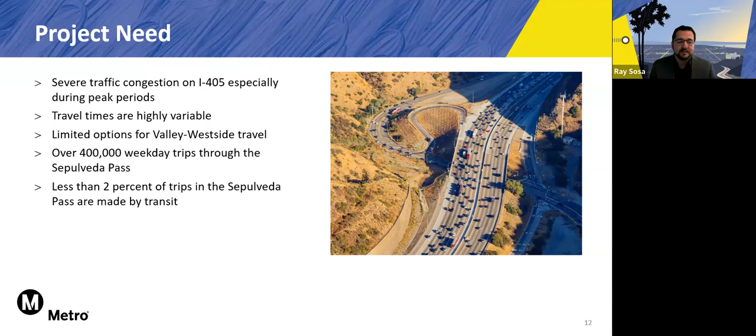So there are goals and objectives in this study. We want to improve mobility for everybody, whether you're driving a car, whether you want to take a bus, or you want to take a bicycle. We want to make sure that there's improvement for everybody. We also want to make sure that the solutions we come up with are cost effective and minimize risks, and also support local economic and community development. At the same time, we know that this is a very sensitive corridor, so we want to protect environmental resources and enhance the corridor's resiliency in case we have any sort of emergency, natural or non-natural, so we can have a system that we can depend on.

So we're weaving all our alternatives across 4 areas. We want to improve transit, we want to reduce congestion, and we want to do those things in a multimodal, holistic way, looking at the complete range of solutions that provide access and opportunity for everybody in a fair and equitable manner, and we want to do that in a sustainable way. With that, I'm ready to hand it over to our project director, Cory Zelmer.

Thank you, Ray, and good afternoon, everyone. As Stephanie mentioned, we'd like to start with a little bit of background on the project for those newer to the project with us. What I'd like to do is start by going back through a few key milestones and events that brought us to where we are currently in the project. That goes back as far as 2016, when LA County voters approved Measure M, a half-cent sales tax throughout the county that allowed for funding to go towards this project and for the implementation of transit improvements between the San Fernando Valley, the West Side, and eventually LAX.

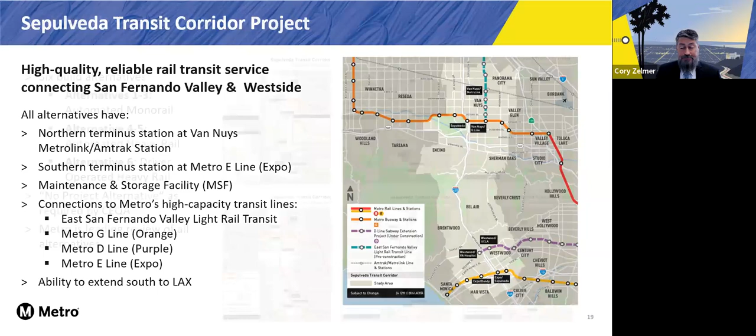So I'd like to now switch to the remaining 3 alternatives, alternatives 4 through 6. These are heavy rail alternatives, most similar to today's existing B and D line in the Metro system. Alternatives 4 and 5 are being advanced by one of the PDA teams, Sepulveda Transit Corridor Partners, and they are also both proposing automated heavy rail technology, which means the trains do not require an operator.

So let me go through a description of each of these. I'll start with alternative 4 first. Now, alternatives 4 and 5 have the exact same alignment and proposed station locations for both of them, so I'll walk through alternative 4, and then I'll just explain the difference alternative 5 has from alternative 4.

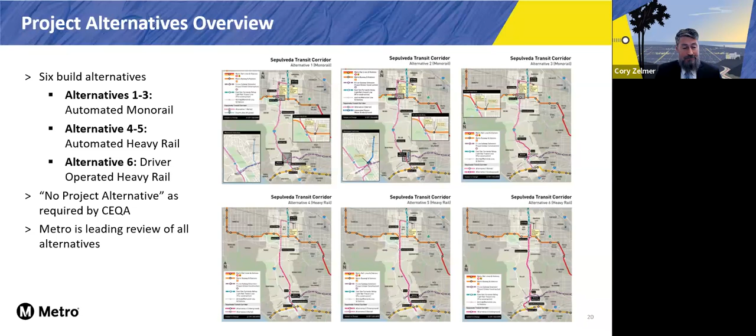Right now, we're preparing a number of technical studies for each of the alternatives. These studies eventually inform and feed into the preparation of the draft environmental impact report. We do expect to release the draft EIR early next calendar year, with at least a 60-day public review period. Following that review period, we expect Metro staff will take to the Metro board a recommendation for a locally preferred alternative, essentially the recommended project to advance toward construction.

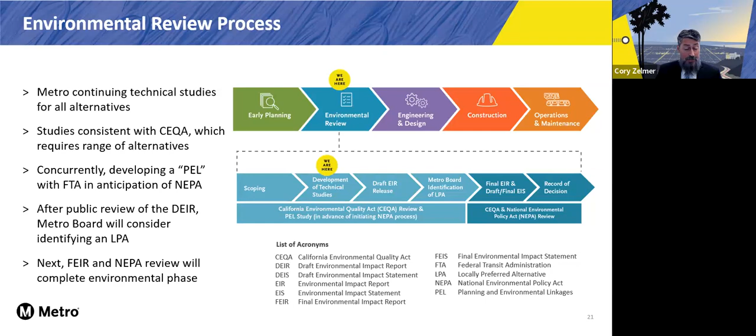Should the Metro board choose to approve that project, we would then move into preparation of the final environmental impact report, and in parallel begin the federal environmental review process as well. Once we complete both the state and federal environmental review steps, we will have completed the entirety of the environmental review phase.

So how do we get to a single project that we would recommend? There are a number of inputs that go into that evaluation, starting with public input. We want to hear from you about your thoughts and concerns around the different alternatives being proposed, and any thoughts about potential environmental impacts that may be associated with those. We will also conduct environmental analysis, which I'll speak about in just a moment.

We're also looking at technical feasibility. Can these projects be built in the constrained environment we are working in? We also want to look at schedule—how long would it take to get each of these projects open for service for the public? And lastly, financial considerations, both in terms of what it takes to build, operate, and maintain a new transit line, as well as leveraging our existing local resources to pursue other opportunities at the state and federal level for funding.

So in terms of the environmental review itself, it's one component of this evaluation, and an important one—it gives us a lot of good information to make decisions from. During the process, we want to evaluate the performance and benefits of each of the alternatives. We obviously study the potential for environmental impacts associated with both the construction and operation of each alternative.

We also want to look at the proposed project and its impacts in relation or combination with other projects in the study area with similar impacts—we refer to that as cumulative impacts. And lastly, where we do identify potentially significant impacts, we strive to find mitigation measures, which are simply actions we take to avoid or substantially lessen those potential significant adverse impacts.

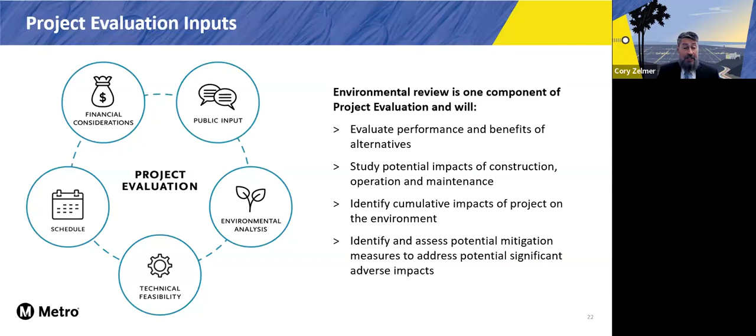So with that, let me hand it to Anthony, who will take us through our outreach efforts to date.

Thank you, Cory. Once again, my name is Anthony Crump, I'm the Executive Officer for Community Relations. The journey of our current phase started in November of 2021, when we kicked off the environmental review process with our scoping meeting. At that time, we held three virtual meetings with more than 500 attendees and received more than 3,000 comments as part of the scoping period.

We continued our outreach with a survey in the summer of 2022 that was conducted in English and Spanish via telephone and online. We had more than 1,000 respondents to that survey.

We continued our outreach in January of 2023 with our station location open houses. We held 2 in-person meetings and 1 virtual meeting with more than 500 attendees in total. We also received more than 1,800 submissions covering a variety of topics, including the heavy rail alternatives, support for an on-campus UCLA station, as well as questions about the monorail connections to UCLA.

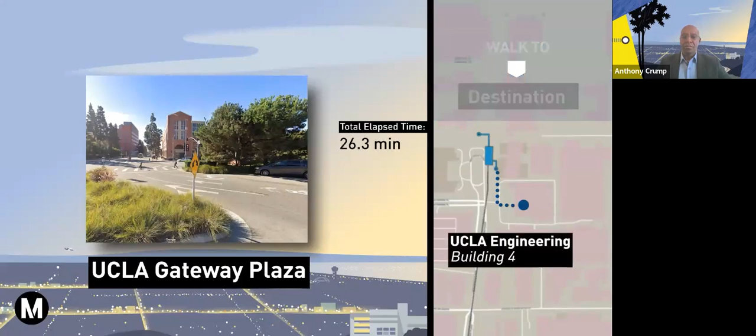And you'll note that Conrack, our graduate student, saves approximately 24 minutes using this particular alternative. Our third and final customer journey for today includes a paralegal from Valley Glen working in Century City, traveling from Van Nuys to Century City Constellation Station on alternative 3.

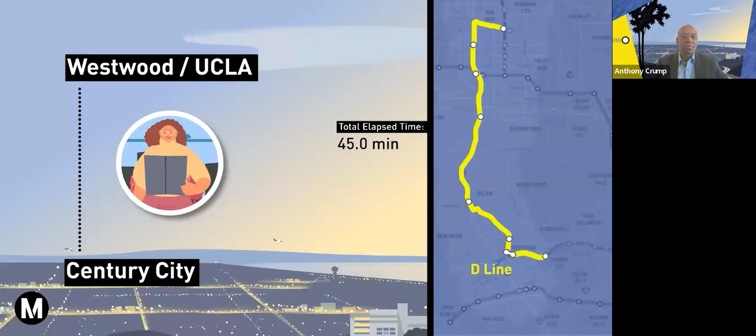We'll note that Rita, our paralegal, saves approximately 52 minutes with this particular alternative. All of the customer journeys will be available on our website. All 6 of them will be available on our website following our series of meetings. But with that, I'm going to turn it back over to Corey to talk a little bit more about the proposed removal of alternative 2.

Thank you, Anthony. And let me start by first giving an overview description of each of the 3 monorail alternatives that have been studied to date. Again, there are a few folks with us today who may be newer to this information, so I'll walk through it briefly here before talking about the removal of alternative 2.

So all 3 monorail alternatives have the same alignment and the same proposed station locations between the Van Nuys Metrolink station on the north down to the Getty Center halfway through the Santa Monica Mountains. Let me just describe that alignment first, and I will not do that again for the remaining 2, just describing the differences between these 3, which primarily revolve around how the alignments interact with the Metro D Purple Line, as well as provide connections to UCLA campus.

So first of all, starting with alternative 1, this is a fully aerial alignment for its entire length. It begins with an aerial station at the Van Nuys Metrolink station at Van Nuys Boulevard, then moves west-northwest near the Metrolink right-of-way to the 405 freeway. From here, it turns south on the east side of the 405 freeway with a station stop at Sherman Way, continuing south to an aerial station at Metro G or Orange Line, again continuing south along the 405 to a station near Ventura Boulevard and the 405.

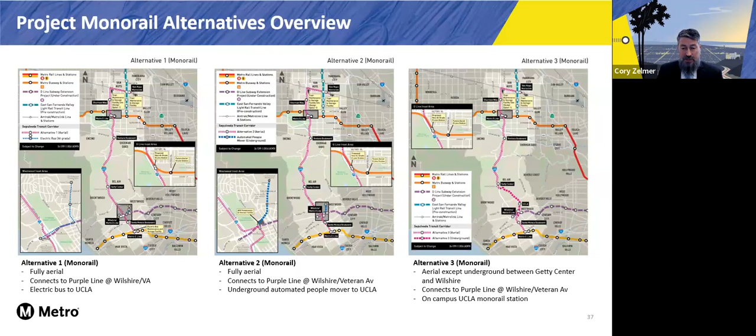In terms of numbers at a glance, here's a summary of information we've provided in past meetings, as Anthony mentioned. Starting at the top with the overall length of the monorail system itself, which ranges between 15 and 16 miles.

The configuration of the alignment, meaning whether it's on a structure above the street, what we call aerial, or underground in a tunnel. The number of stations is 8 or 9. The additional station for Alternative 3 is on UCLA campus.

Different ways to connect to UCLA, as I described a moment ago. The overall end-to-end travel time, going from the northernmost station at Van Nuys Metrolink all the way down to the E Expo Line, ranges between 28 and 32 minutes, which is highly competitive with the private automobile today.

Also, the travel times between the northernmost station at Van Nuys Metrolink to UCLA range between 24 and 39 minutes, again with different options for connecting to UCLA.

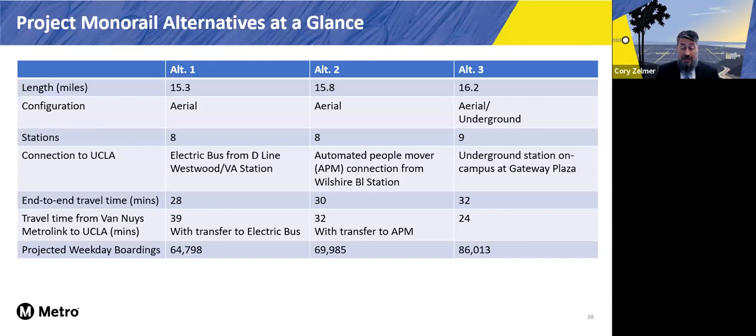And lastly, the number of weekday boardings we anticipate on these different alternatives ranges between roughly 65,000 and 86,000, which is competitive with our B and D subway lines today, and even better than many of the light rail lines we have in the system.

So in terms of removing Alternative 2 specifically, let me recap how we got here. As I mentioned, it was the last alternative to be included in our environmental study. It was added at the request of LA Skyrail Express in 2021, in response to the feedback we were getting around providing good options for connecting to UCLA.

More recently, however, LA Skyrail Express requested that Alternative 2 be removed from further consideration, based on their own evaluation over the number of years they've been studying it, and in comparison to Alternatives 1 and 3, which they are still advancing. Metro received this request and independently considered it.

From an environmental perspective, we determined two points. First, that Alternative 2 is challenged to provide environmental advantages over the other alternatives, which essentially means we do not expect Alternative 2 to avoid or substantially lessen impacts associated with other alternatives.

The challenges we refer to are largely associated with the alignment unique to Alternative 2, shown in the map in the bottom left inset, where the alignment tries to come out of the 405 freeway along Wilshire Boulevard to a station at Veteran, and in doing so passes by the Los Angeles National Cemetery and makes its way around the federal building on Wilshire, which is a historic resource, on its way back to the 405 and continuing south.

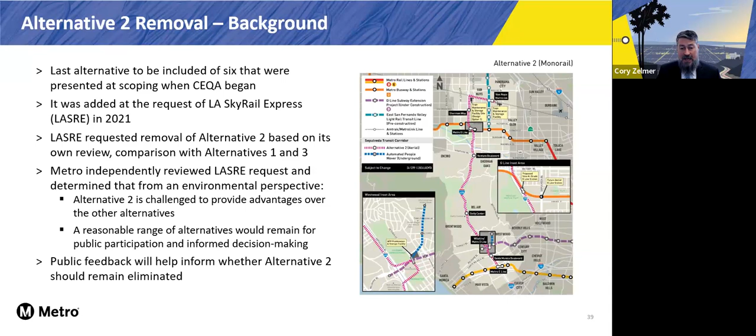Removing an alternative is not unique and is not new. It's obviously allowed per CEQA or the state environmental guidelines. In many cases, the documentation of why an alternative was introduced and then later removed is contained in a section of the EIR or in the administrative record, which comprises the EIR. This has been done on other metro planning studies as listed here.

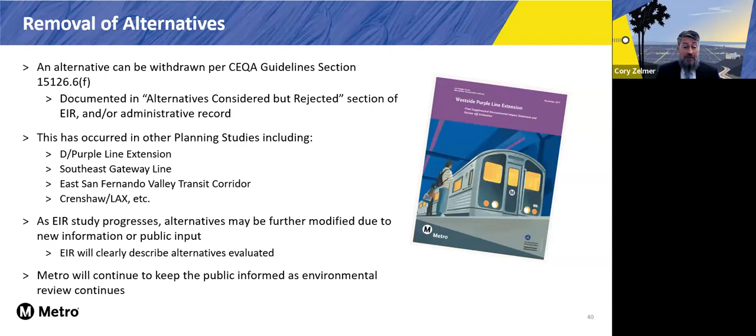As the EIR progresses, should alternatives be further modified due to new information or public feedback, we'll be sure to describe the final state of each alternative that is evaluated as part of the environmental impact report. And as Anthony mentioned, we'll continue to strive to keep the public informed as we continue with our environmental review process. And with that, let me hand it back to Anthony to close out with next steps.

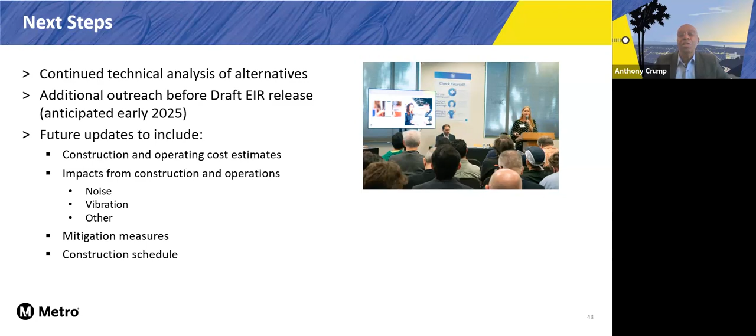Again, today's focus is on the potential removal of Alternative 2. We do ask that you share your comments and your input with us by Thursday, May 23rd. You can do so in our in-person community meetings, the one that we're having tomorrow evening. You can do that by sending an email to sepulvedatransit@metro.net. You can also use the QR code that's shown on the screen right now, or you can actually send us mail to Peter Carter, Project Manager, at 1 Gateway Plaza.

Once we've received all of the input and comments and information from the public, we'll do a summary report on the feedback that we've received. We'll also be doing a report and making a final decision regarding the removal of Alternative 2, which we'll release to the public as well as to the Metro Board of Directors.